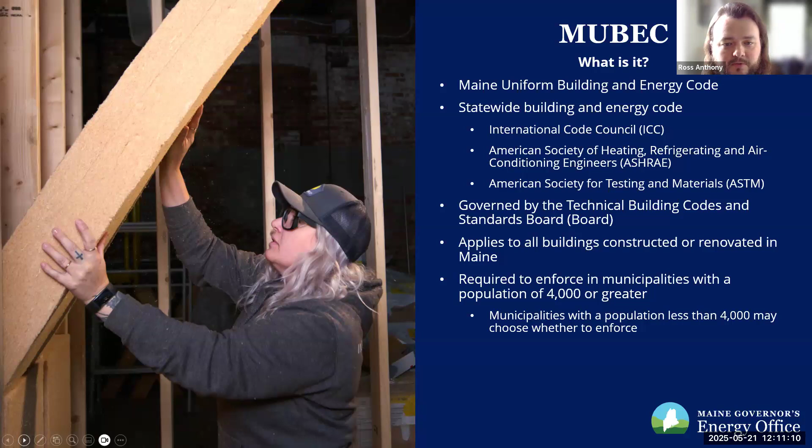Within codes, there's a lot of flexibilities and options for pathways to compliance. And a lot of contractors tend to adopt the most recent code MUBEC as the standard of their practice. So always important to talk with your contractor about building codes. Next slide, please.

Continuing on with just a little bit of information and overview surrounding MUBEC, I did want to point out 3 pieces of legislation that we have within the state. The first one is the establishment of the Division of Building Codes and Standards. This is essentially the technical support for the board, the Technical Building Codes and Standards Board that I talked about on the previous slide.

We also have a piece of legislation regarding the cadence of building code adoption and updates in the state. We are required by law to ensure that both ICC and ASHRAE codes are either the most recent edition or the edition previous to the most recent edition. And for reference, the ICC tends to release codes on a 3-year basis, for instance 2015, 2018, 21, 24. So it's not every year that codes are released for adoption. There is a bit of a gap in between the release of those codes.

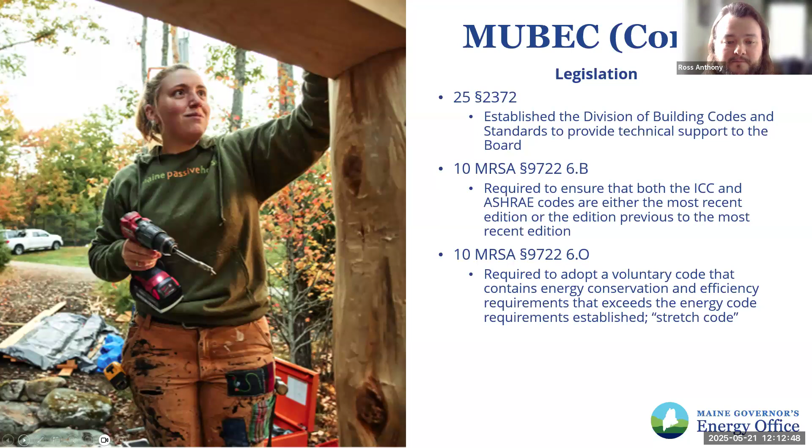And then lastly, I did want to highlight the requirement at the bottom for the adoption of a voluntary code. This is a voluntary energy conservation code, essentially showing that energy conservation and energy efficiency are exceeding the established energy code. You'll hear this referred to as the stretch code. Again, this is voluntary, but we are statutorily required to adopt one. There are a couple of municipalities in the state that have opted to adopt the stretch code as their base energy code.

I'm not going to spend too much time on this one because Greg is going to be diving into this with much more detail, but just wanted to highlight the previous codes that we had and now the current codes that we have. So you can see updates with ICC and ASHRAE, as well as our stretch code. The radon control, that is the ASTM 2008 standard, to my knowledge, has remained unchanged.

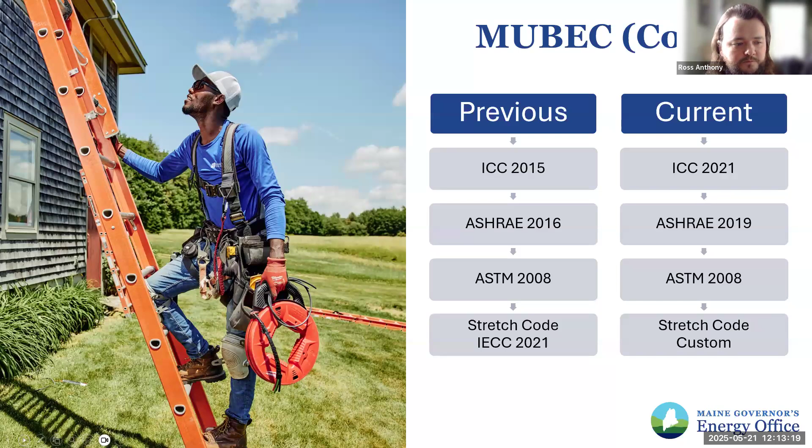So in general, why are building codes important? Well, first and foremost, you receive greater energy efficiency. There's improved energy efficiency standards that will reduce heating and cooling costs and promote clean energy. Building codes make buildings safer. There's improved structural guidelines that will help protect homes and businesses from natural disasters and wear and tear over time. There is higher quality indoor air quality, better ventilation and radon protection that will improve indoor environments. And also there is consistency statewide, a uniform code that ensures fairness and clarity for builders, contractors, and homeowners.

And there's a lot of benefits that come along with the new codes. For instance, the Department of Energy, in partnership with the Pacific Northwest National Laboratory, have estimated a little under $1,000 in energy cost savings in the first year of a structure with the new codes, and life cycle cost savings of over $23,000. The great news is that there is a payback period of less than 5 years for buildings built to this standard.

And I will note that we do have several trainings that are available. These links, again, will be provided via the slides and posted online. So feel free to look at the trainings that we have throughout the state.

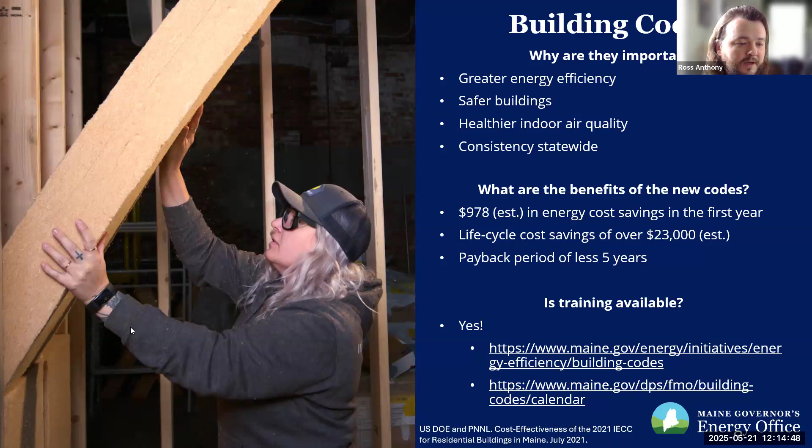And lastly, I just wanted to offer up a couple of resources that we have, both within Greg's office, as well as some materials that have been put together by the Governor's Energy Office. We do also have the Clean Energy Partnership working on clean energy workforce development, and a part of that involves code training. So I wanted to highlight that as well and provide the link to MOCA. Again, it's anticipated in the fall of this year that codes will be transferred from the Department of Public Safety over to MOCA.

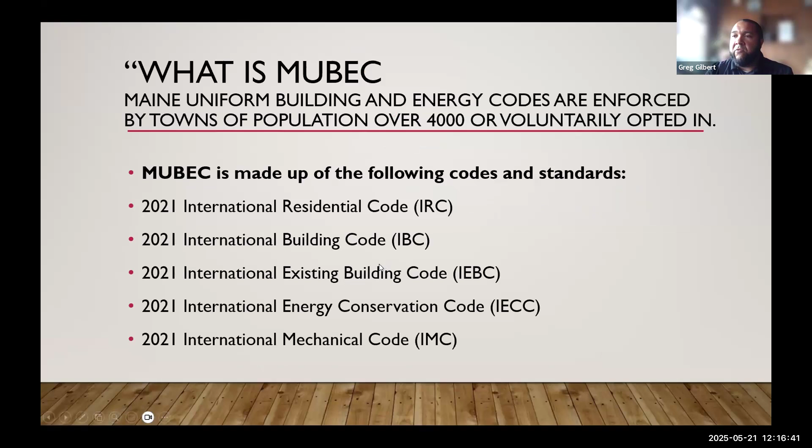So we're talking today about the MUBEC update. And Ross mentioned where MUBEC comes from, but to get a little bit more into it, what is included in it. There are 5 international codes included: the 2021 residential code, the commercial building code, the existing building code, the energy conservation code, and the mechanical code. Also included are ASHRAE standards and an ASTM standard. The ASHRAE standards are ventilation standards that help, as Ross mentioned, to provide fresh, clean air within dwellings and buildings.

And then the ASTM standard is the standard for radon control. These are all mandatory, mandatory across the state, and as was explained, towns and municipalities over 4,000 must adopt into their ordinance some sort of enforcement language. Technically speaking, all towns under 4,000, the contractors are still subject to build to these codes and standards, but those towns are not specifically required to adopt enforcement language.

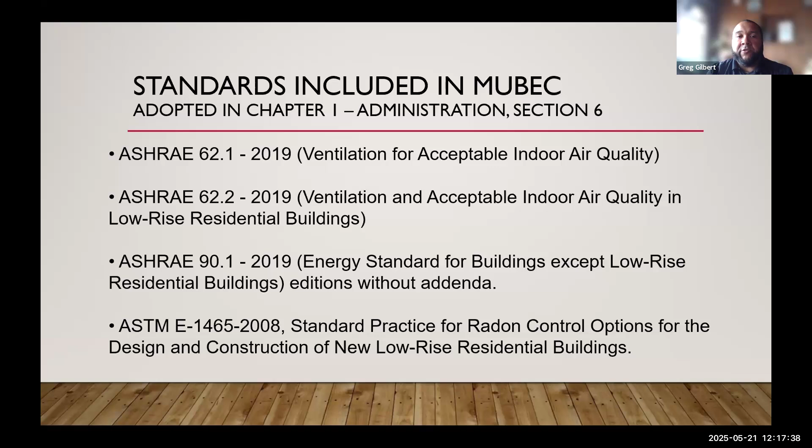So we'll start off talking about the commercial code, and I will kind of fly through this because, as we said, there's just way too much to really get into the weeds and any real depth of updates. So the scope of the IBC—the scope is the only part I will read out loud—the provisions of this code shall apply to construction, alterations, relocation, enlargement, replacement, repair, equipment, use and occupancy, location and maintenance, removal and demolition of every building or structure. So that's literally anything you can think of, right? Any type of construction, any type of modification.

Except for, with this code, one and two family dwellings and townhouses, which is covered by the residential code.

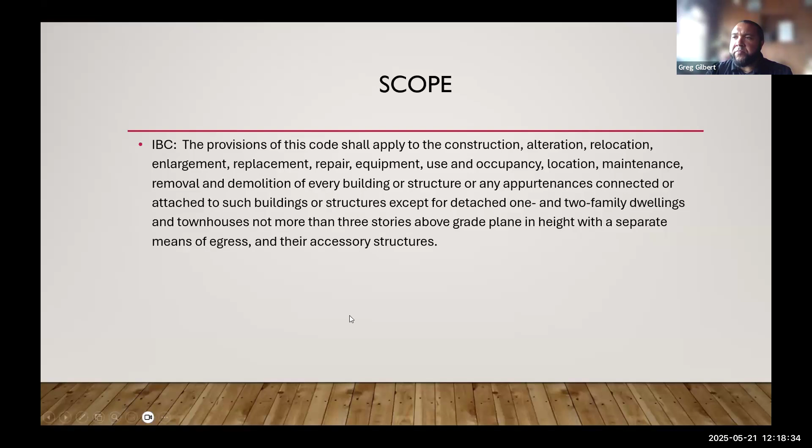So the major updates in the IBC are, we'll start with the definitions. They added some new language about greenhouses, puzzle rooms and play structures, occupied roofs, and owner-occupied lodging houses. These are all new things that people have had issues with in the past, so the developers of these codes decided it was important to add this information.

Another new section is for mass timber. In the past, heavy timber was included, but now it includes type 4A, 4B, and 4C, which include things like cross-laminated timber and other types of manufactured timber products. Type 4A being the most protected, and type 4C being the least protected, as far as fire ratings and things like that. You can see these changes in the allowable stories, heights, and areas tables in Chapter 5 of the IBC.

As well as much more in-depth descriptions of what the actual construction types require in Chapter 6. In Chapter 9, we get some new information about fire sprinklers, that they're now required in Group E, which is education occupancies that have fire areas greater than 12,000 square feet, and that have fire areas located on floors other than the level of exit discharge or the first floor, or if you have a ground floor that has an exit.

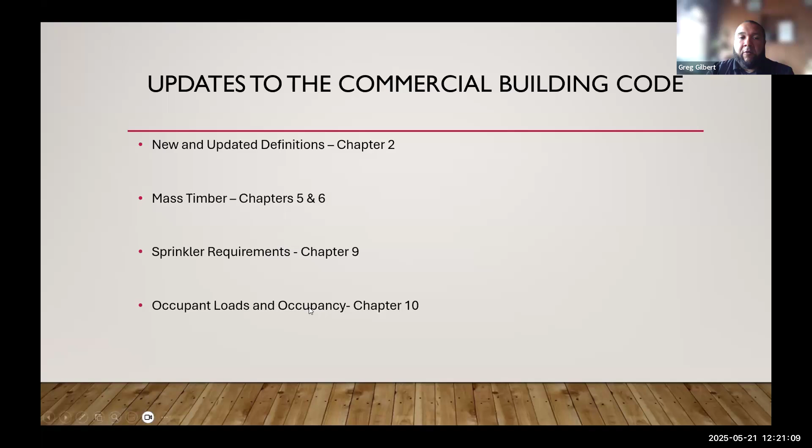We'll move on to existing building codes. So for this, kind of the same deal: the provisions of this code shall apply to repairs, alterations, change of occupancy, addition, and the relocation of existing buildings. So the IBC is for new construction generally, and this is for existing buildings, except for one and two family dwellings and townhouses, same as the last.

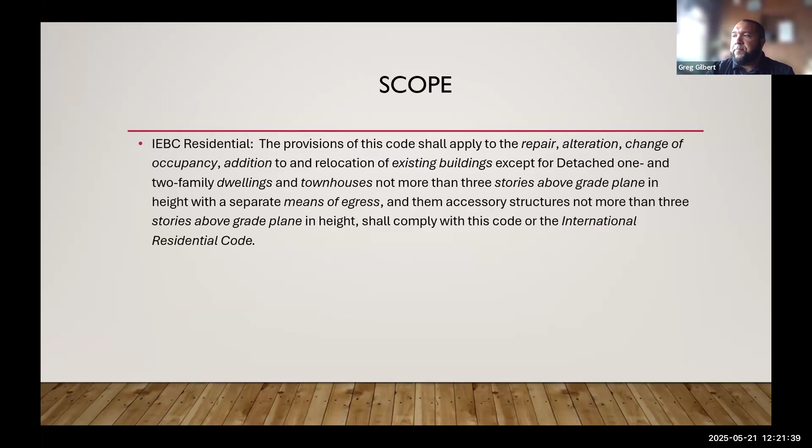So not a whole lot of new information here. With Chapter 4, there are updates to the language about repairs, mainly pertaining to the electrical and mechanical repairs for healthcare facilities. This kind of brought it in line with NFPA a little bit.

Chapter 5 speaks on the additional language for the requirements of smoke compartments and areas of refuge in I occupancies, as well as updates for other emergency situation systems, like the locking arrangements of doors in educational occupancies and the different uses and requirements for two-way communication systems.

There's new language regarding the replacement of windows, bars, and grills over windows. We also get into emergency escape and rescue openings, also known as EEROs, in Chapter 5, and it goes into even more detail in Chapter 7.

At this point, I wanted to go over how the IEBC worked a little bit as far as their work classifications are concerned. So you have three different classification levels: level 1, level 2, level 3. Level 1 being the alterations, including removal or replacement of coverings, existing materials, equipment, fixtures, things like windows, doors, wall finishes.

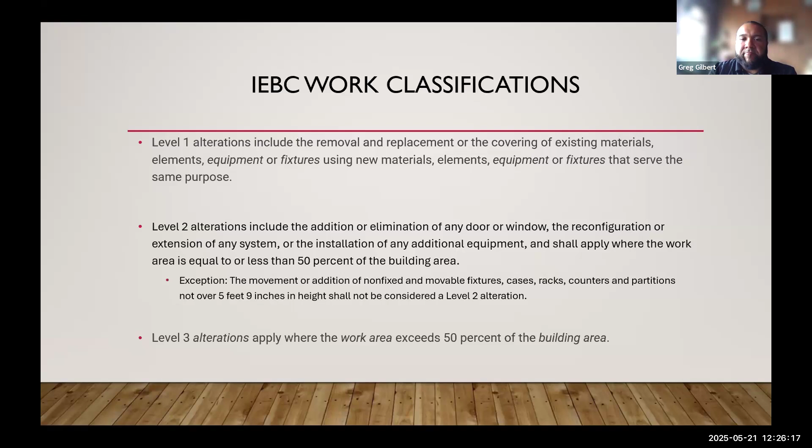We'll just jump onto the residential code because I know we've got limited time now, and the residential code I think pertains a little bit more to more folks out here.

New and updated definitions in the IRC, specifically to the word building. So the word building is now more in-depthly defined. Emergency escape and rescue openings, fire retardant treated wood, has an updated definition. Habitable attics and shipping containers are now discussed in the IRC. Some of you may have seen that some municipalities do try to use shipping containers as either whole dwelling units or parts of dwelling units, or in some cases maybe looking to build larger buildings with them. But those definitions have been added.

One of the other additions to the residential code is the addition of radon. Radon control was the standard that we spoke about a little earlier, that ASTM E1465-08 that goes over radon control.

Now the IRC - I did a little out of order here, but as we went over scope before, it's generally the same thing as the IBC, except this one pertains specifically to 1 and 2 family houses and townhouses.

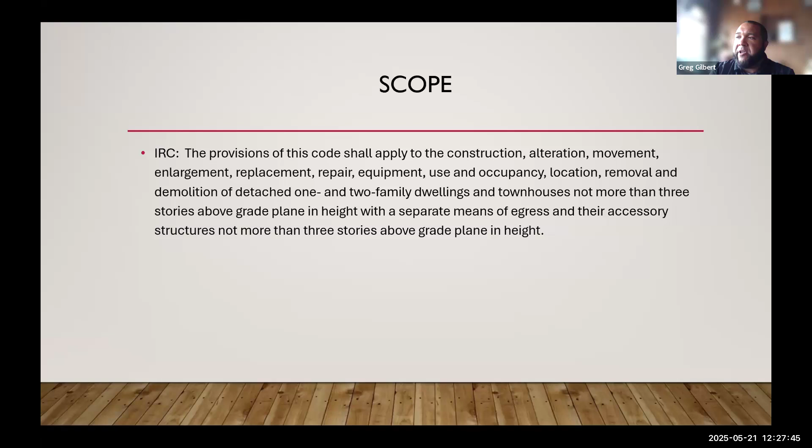I did want to give a quick overview of just a few things that do not require permits. When it says permits, it really means a building review, because most municipalities will have zoning or land use requirements that do require permits. So I don't want to give you the idea that you don't need to apply for a permit at all - it's just that these don't necessarily require building reviews.

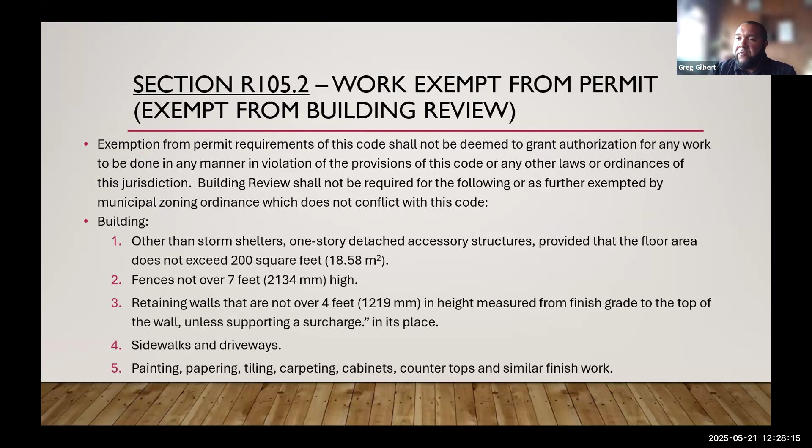So we're talking about storm shelters and 1-story detached accessory structures, fences not over 7 feet, retaining walls, things like that. And it goes on to prefabricated swimming pools that are less than 24 inches deep. So, your standard pool or in-ground pool are still going to require one.

Swings and certain playground equipment at a residential level that is not public or at a daycare - this is only for a 1 or 2 family house. And then decks not exceeding 200 square feet, where the deck height, the floor height, is not more than 30 inches off the ground.

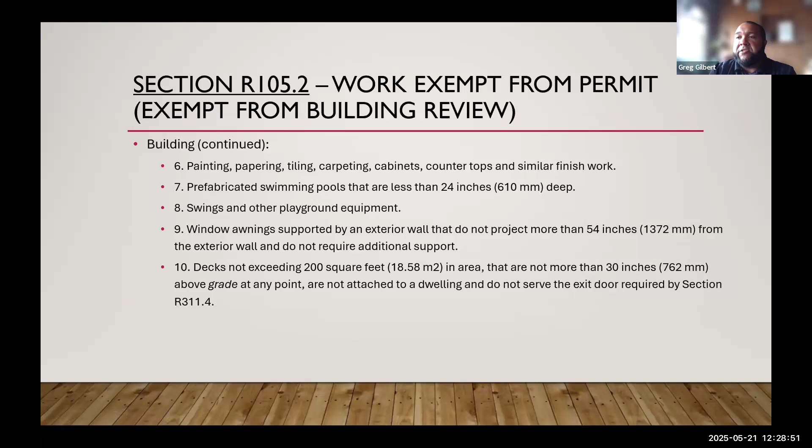Other updates that we have, aside from the definitions and radon requirements - in the code it specifies that the majority of walls only require a 1/2 inch of gyp separation between habitable areas, unless directly above sleeping areas. The MUBEC board has decided to change that to 5/8 inch type X, which a lot of folks will see in standard fire resistant rated construction, against all walls that are adjacent to habitable spaces. So in the garage, no more 1/2 inch unless it's against a wall that is not up against habitable space.

Some more of the updates we have in the IRC deal with the emergency escape and rescue openings, like I mentioned in the IBC and existing building code. So basements, habitable attics, and every sleeping room shall have not less than 1 operable emergency escape and rescue opening, except where the building is equipped throughout with an approved sprinkler.

I did want to note that even in cases where towns do their own sprinkler reviews, all sprinkler systems and sprinkler modification reviews also need to be submitted to the state fire marshal's office for review and approval before installation.

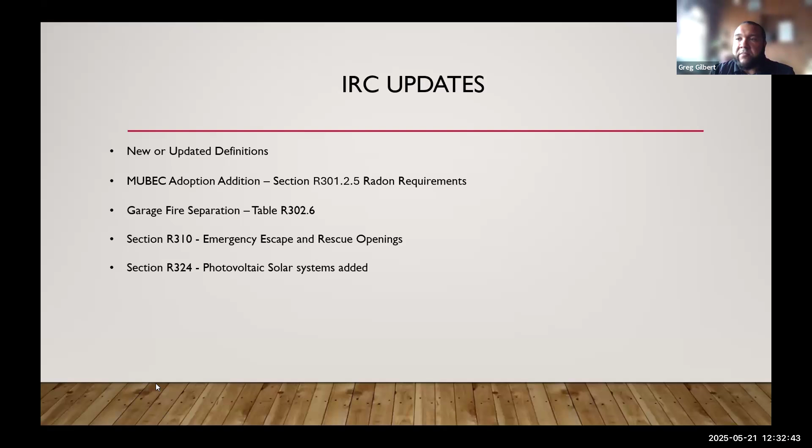We will jump now to the energy code, everyone's favorite thing to talk about. I know it's mine. We'll talk about the scope first.

In the energy code, you have 2 different provisions. You have the commercial provisions and you have the residential provisions. The commercial provisions apply to all commercial construction and residential construction that is higher than 3 stories. The residential provisions apply to 1 and 2 family dwellings, townhouses, as well as R2, R3, and R4 residential types that are 3 stories or less.

So you can have an apartment building that has 200 units in it. As long as it is 3 stories or less, you would use the residential provisions of the energy code for that. If you have a commercial application on the first floor and you have residential for 2 stories above that, those 2 stories would apply the residential provisions and the first floor would apply the commercial provisions. Just a little heads up on that.

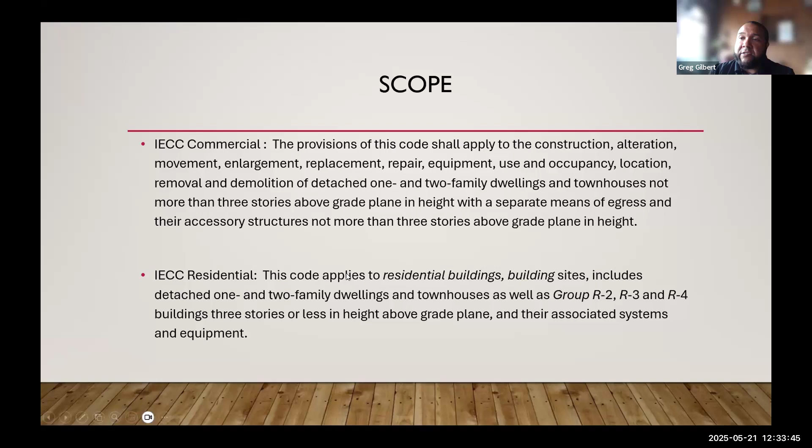So our commercial pathways: we have our prescriptive, which is generally the same as the residential prescriptive. Your pathway is pretty much written out for you in the book. You follow what the book says, you meet all the requirements, and you have met the prescriptive provisions. You also have your UA alternative, which takes the U factors, kind of recalculates them, and allows you to alternate different things or find alternative methods of meeting things.

So if you're having trouble hitting a ceiling insulation requirement, and you can make that up by meeting that with better windows or more insulation in the walls, you have options to play around with the way that the prescriptive method defines how you need to meet compliance.

Then you have the total building performance, which establishes criteria for compliance using the different systems and loads throughout the building that you're making, to determine the total building's performance through its heating systems, cooling systems, service water heating, fan systems, lighting and power, different things like that.

ASHRAE 90.1 is one of the other ASHRAE standards that also allows you, or describes to you, how to meet compliance for commercial buildings through its standard. And the IECC 2021 specifically allows you to use that, as well as the fact that we have adopted it as a secondary method. Then there's the passive house and DOE zero energy provisions, which are 2 other alternative pathways to meet compliance through your commercial energy construction.

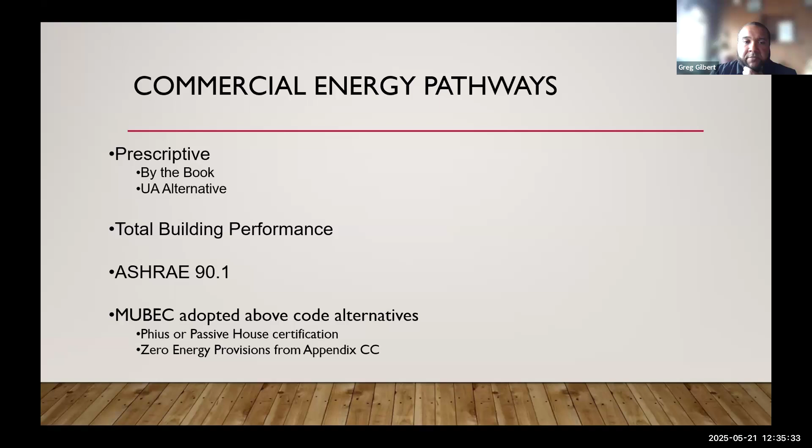So some of the updates here are in table C402.1.3, which is generally your envelope table. It goes through the different types of construction that you could have, whether it's metal construction, frame construction, mass walls with concrete block or something like that, and tells you what insulation requirements there are for those types of construction. And then C402.4 is similar, but it's for your fenestration. Fenestration being your windows and any doors with, I believe, more than 50% glass or glazing. Also includes skylights and things of that nature.

So then we get into the heating and cooling unit capacity and efficiency. In section C403, there are a plethora of tables that go over the different types of heating and cooling systems, their sizes, their efficiency requirements, and different testing standards.

And then in C403.7.4, they've added new information about energy recovery ventilation systems. You may have heard of them referred to as ERVs. These help with ventilation within buildings and help recover the energy that goes out. So if you're trying to heat the building and you have to exhaust some warm air out, this system will help heat the air coming in, not by mixing it, but by using the heat from the air that it's exhausting from the building.

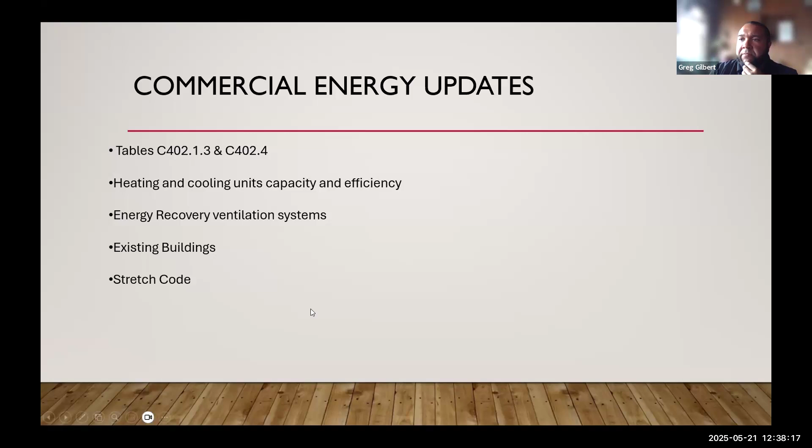We'll jump to residential pathways. Like I said before, the prescriptive method is generally the same as far as following what the book has written, and then you have your UA alternative, which allows you to use software like DOE's REScheck to swap things around and find the best method for you to meet your compliance goals.

Generally speaking, folks will use table 402.1.3, which gives you, as with the table we talked about for commercial, your requirements for building envelope and insulation. There are modifications made to this by the MUBEC adoption, specifying that one of the options is R20 cavity insulation and R5 continuous insulation around the outside of the building. This has been modified so that with the R20, you're now required to use R10 continuous insulation, and with the R13 cavity requirement, that has also been increased from R10 continuous to R15 continuous.

Getting into lighting and power: lighting equipment, all permanently installed lighting fixtures, excluding kitchen appliance lights, shall contain high efficacy lighting sources. Also, permanently installed lighting fixtures shall be controlled with either a dimmer, an occupant sensor - a motion sensor or some other type of occupant sensor - or other controls built into the fixture. It goes into a bit more detail than that.

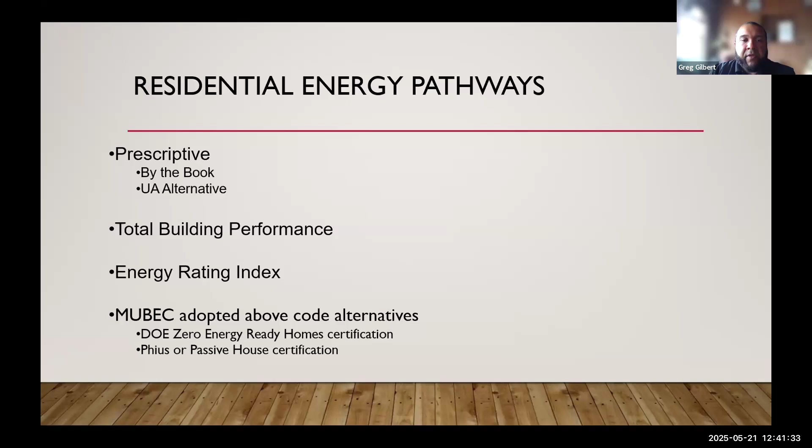And then we can jump into the stretch codes. There's a stretch code provision for both the commercial and the residential portions. For residential projects that do not include fossil fuels of any kind for heating, cooling, hot water, backup heat, or cooking, the total building UA shall exceed the UA requirements by 10% over the code. Otherwise, it would be 15% if fossil fuels are included.

This effectively means that the UA I talked about relates to your R values - the inverse of your R value is your U factor. When you use software like REScheck that I mentioned before, it will give you a percentage above or below your compliance requirement, or it will say that you failed. But when you're above, it'll give you a percentage higher.

This is saying that you need to meet that by 15%, unless you're not using any fossil fuels, in which point you only need to beat that number by 10%. And generally the same for commercial, except there is no alternative for the lack of fossil fuel uses.

So with the commercial stretch code, those towns or municipalities that are adopting the stretch code when reviewing commercial projects, those projects need to pass using a COMcheck by 15%. And that is regardless of which method you are choosing to use as your pathway. So even if you're using total building, or for residential what they call the ERI, the energy rating index, you still need to have your envelope meet the UA alternative on a REScheck or COMcheck by that 10 or 15% as it applies to the stretch code requirements.

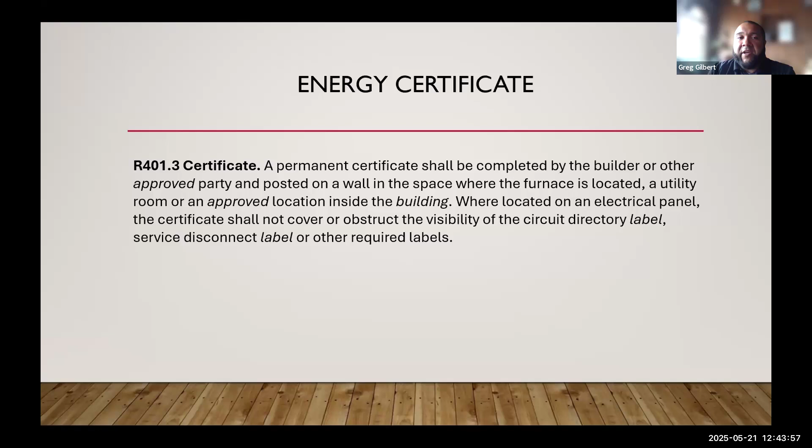And then the last thing I want to talk about is your energy certificate. Your energy certificate is very important, especially for the homeowner. So the contractor needs to put this energy certificate up so that you, as a homeowner or as the building official, are aware of the types of insulation, fenestration, or all the different components to make these buildings meet their energy compliance.

So this will give you the information in case modifications are to be made later, or if you need to replace anything. You have all of this information backed up so that you know the appropriate things to fix them with.

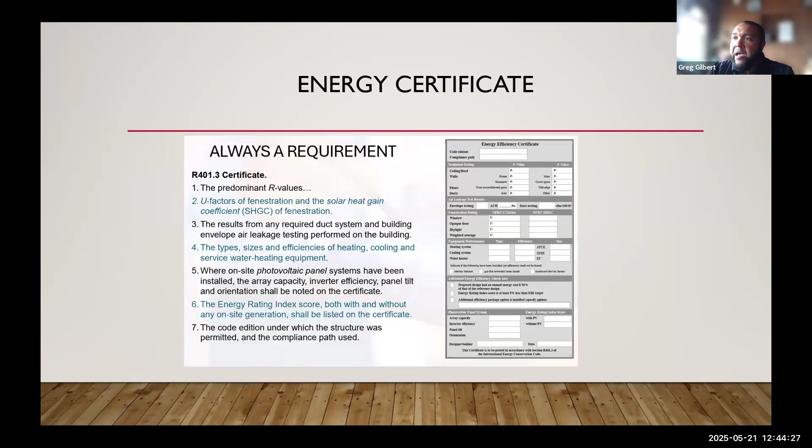I know that was a bit of a mess, but I appreciate your time, and that's all I have for right now.